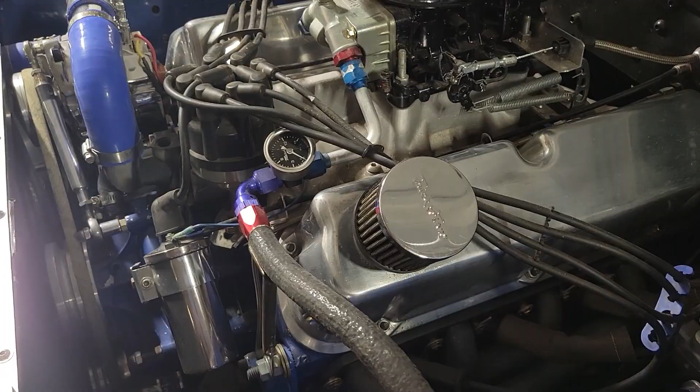We've been climbing around underneath the car and working on some stuff. We also put our little tiny springs in our distributor, got that done. Checked the timing now. We've got all of our timing now in at about 2,700 RPMs. So I think that's going to help us out quite a bit.

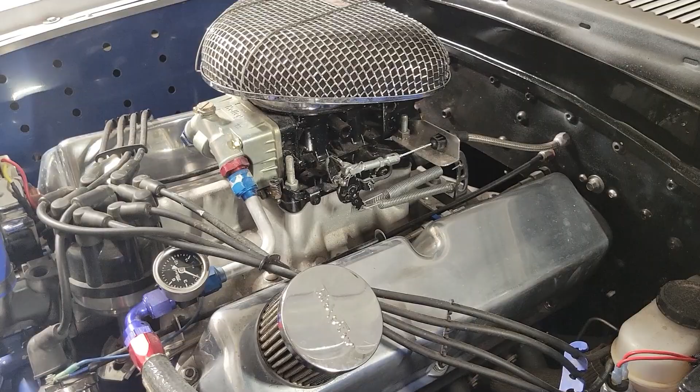The other thing we did is got underneath there and checked our driveline angles. You know, we had a little discrepancy between the front and rear, transmission, the diff, whatever you want to call it. And what we ended up doing was raising the back of the engine up a little bit at the transmount, about 1/4 of an inch, which took some of the downward angle out of the engine to match the pinion angle at the other end.

So hopefully we don't have any more driveline violations. There you go, vibrations. But we'll have to go on a test run to sort that out.

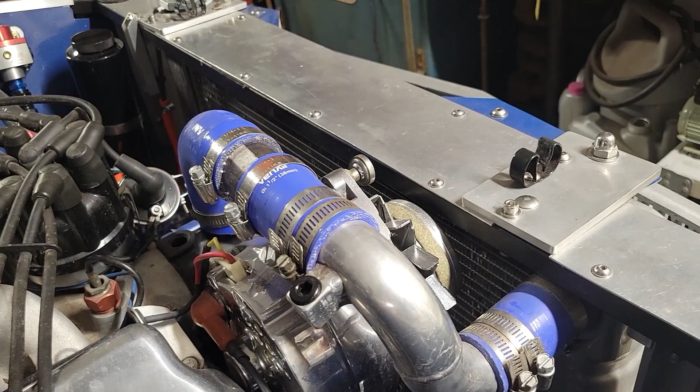We're still trying to cipher this radiator conversion project. And, you know, one of the things we've got to deal with is we've got a piece of box tubing across here, which really makes up what you would call the radiator core support, like a spreader bar between the two fenders. So we really can't come back past that without sort of going underneath it or cutting it out and then putting it on top of whatever we put in there. So we gotta just spend a little time trying to sort this out.

I've had a couple of additional ideas that I've got to look into. One of them would be to see if I can get the dual fan setup first and fit it to this radiator, and see if that solves our problem. And the other thing is, since the super cool rad and the standard cool rad are the same size, once I get the dual fans in there, if I still need additional help, then I can just do a rad swap because everything else is the same. So I'm going to have to look into that.

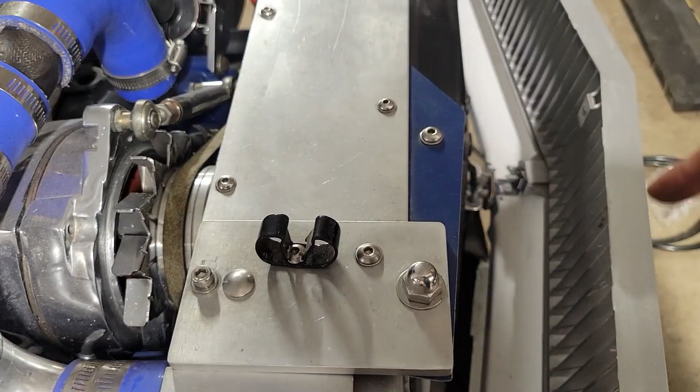I think it'll work. I think we can get the fans on the back side of the radiator, the dual fan shroud, and I think we've got enough room out here to bring the rad out if we have to, however many inches. We may have to trim this lower valance just a little bit because it's kind of V-shaped, so there's plenty of room in the middle, but it tightens up over here, and we may have to notch that a little bit. I think we can make it work.

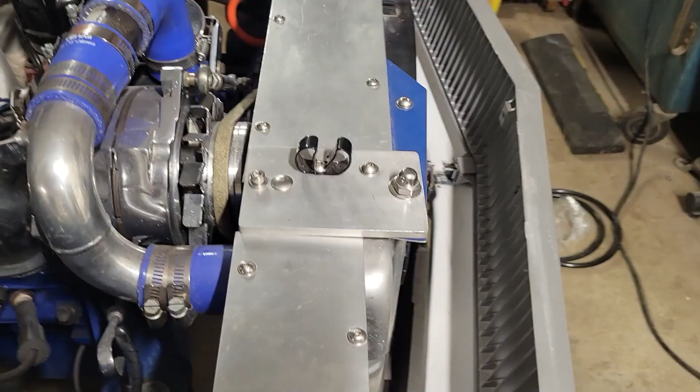I just don't like to experiment. I'd rather be able to have all the dimensions in a template or something and be able to lay the whole thing out and then just put it in there because I know it'll fit. So we'll see what we can come up with. Have to get hold of the radiator people again and see if I can get a little more information from them. I've got some pictures of the product, but it doesn't really answer all my questions. So we'll stay on that.

And we've got the thing up on the lift right now. At some point, we want to put this thing on the ground, and we'll set up our cameras and go for a ride.

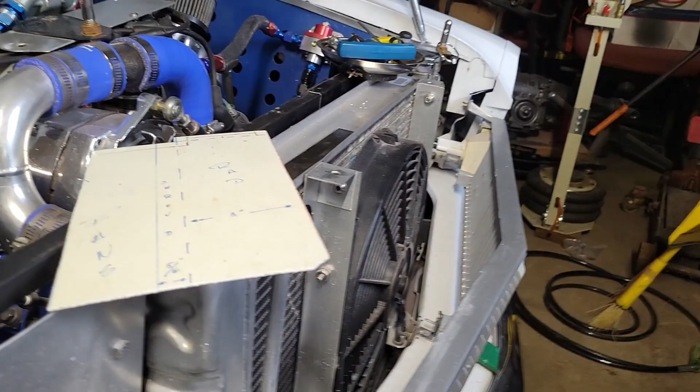All right, we're getting a little deeper into this Pinto radiator project. So we got our template, and we've taken the top off of that. So we can see this is about a 3-inch thick radiator here, at least the tank is. The core here is about 2 1/4, and we have these little lips here.

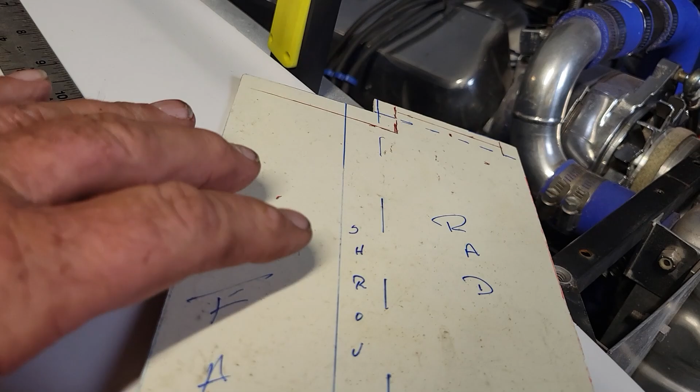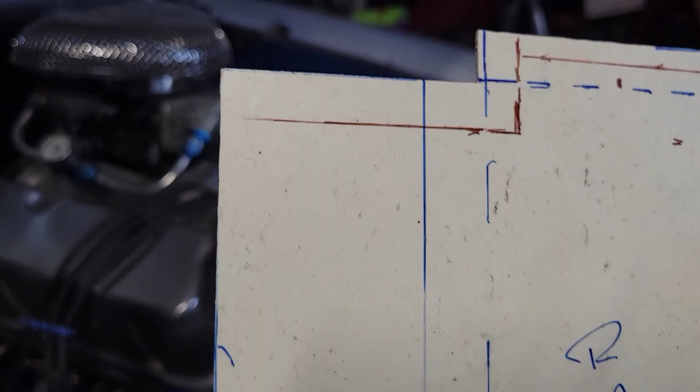Basically, we have our template of what we want to do here to put a shroud and electric fans in. And basically, there we've got our radiator, we've got our shroud, and then this big thick part is the fans. Take up about 2 inches of space.

So I think I'm gonna have to make my own shroud. I was hoping to just buy the package already done and put it in there, but I'm afraid that what's going to happen, I've got this piece of 3-inch tube across here that's acting like a core support, and I'm afraid that's going to be in the way of the shroud the way they make it.

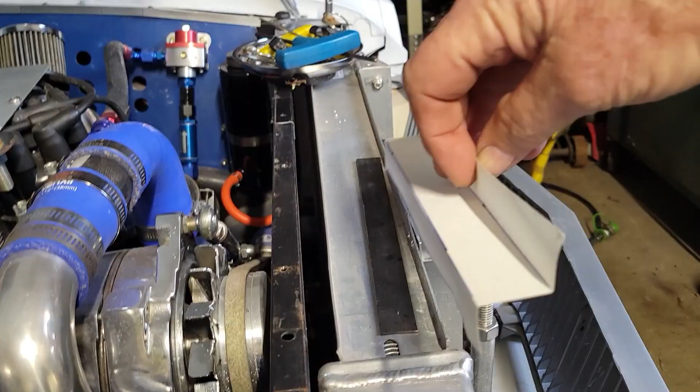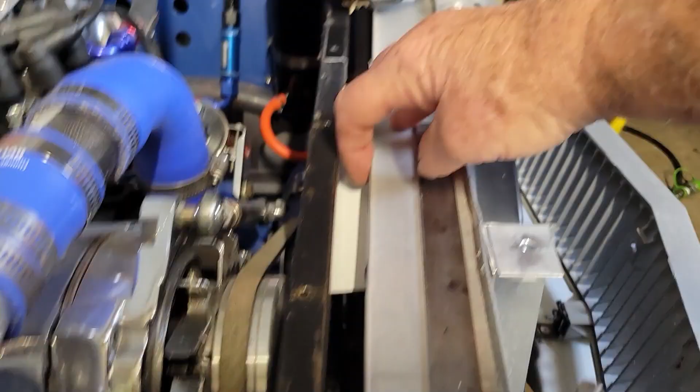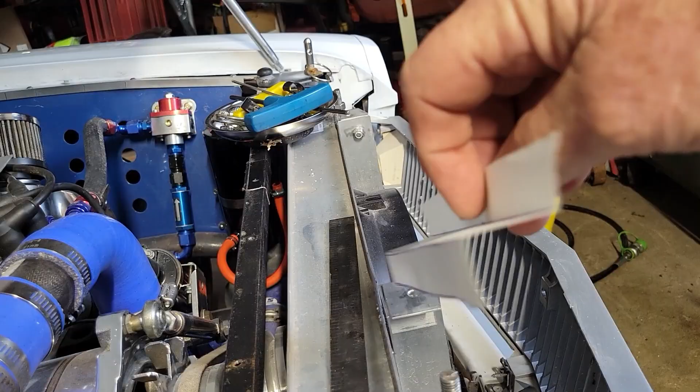So basically what's going to have to happen is I made this little template here, and the shroud will fasten to that lip there above the core, and then go under that piece of tube. And I just don't think the way that their setup is made, it's going to be good enough.

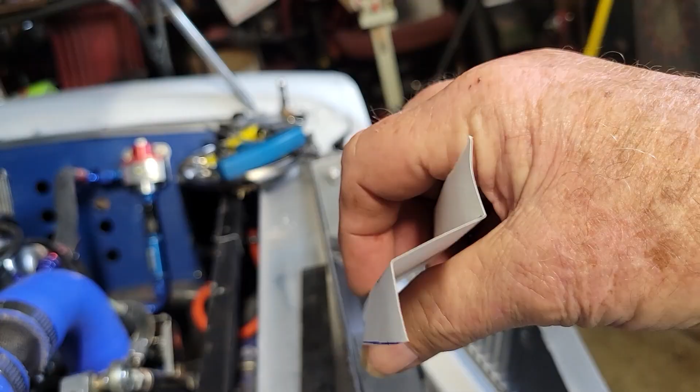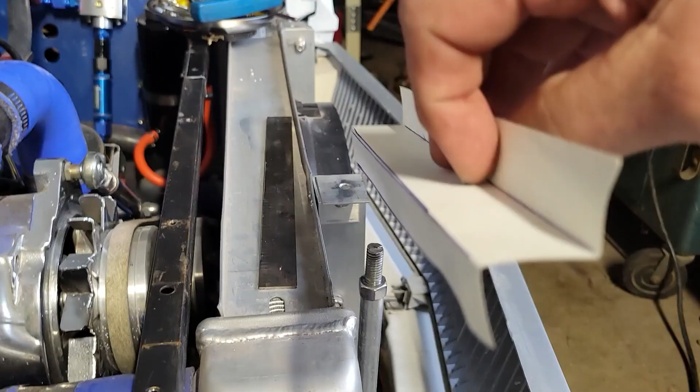This particular piece is 3/4 up and 1 inch wide, and that 1 inch width is going to allow, because this core is set back in here into the tank 3/8 of an inch, so it ends up that the shroud, in order for the fans to be 1 inch away from the rad, that center part's going to be 1 inch. And here in this particular, I made this flange 3/4, but I think what I'm going to do is make it 1 inch, 1 inch, and 1 inch.

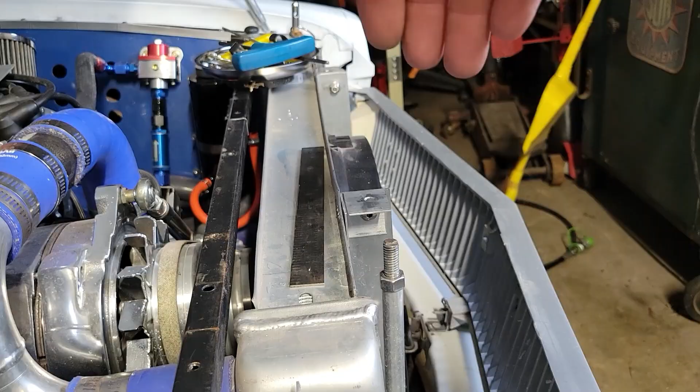And I've got to make this flange the full length, and then I'm going to make the shroud with just a flat panel with a return on each side, and then this will rivet to the top to make the whole shooting match. Rather than try to weld it all together, I'll just rivet this piece to the flat piece, and then that will fasten to this.

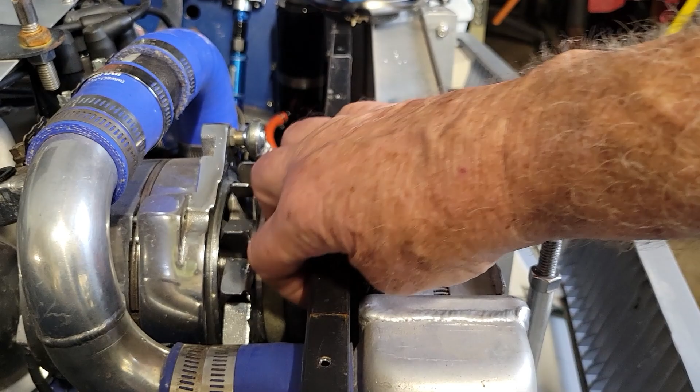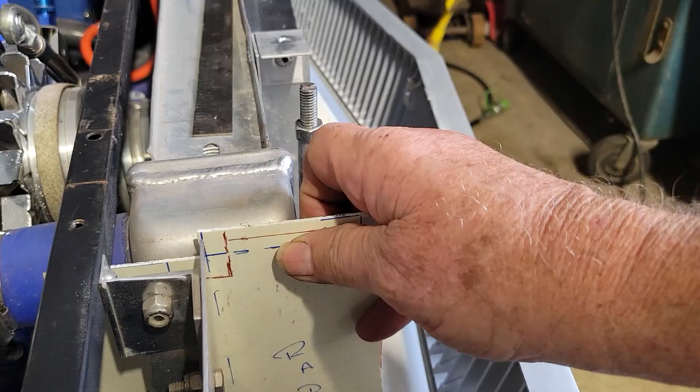And I think by building my own, I'm going to guarantee that I have enough room to be underneath that piece of tubing, because we go back to our template, and what needs to happen is, see if I can fit, that needs to be under there like that, so that really what's going to happen is those fans, the back of the fan is going to be just about flush with the back of that tubing, and that will clear my pulleys.

But that also means that we're going to have to move the whole rad forward about 2 or 2.5 inches. And personally, I don't like that. I like the rad where it is. But, you know, in order to put electric fans on the inside, I don't see really any other choice. And I've already got a fan on the outside. I suppose I could put the shroud on the front and put the dual fans blowing air through, but that's really a waste of a good idea.

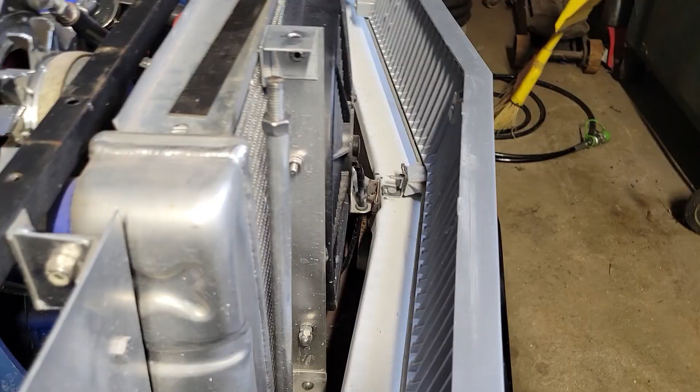So I think what's going to happen is I'm going to have to notch that splash pan there, and probably notch the lower valance, and that rad will come out. It really won't be out any farther than the existing electric fan, but you know, I just don't. I'm not happy. I don't know which one I am, but I am not happy. So, you know, sucks to be me once in a while.

The good news, if there's any good news, is that the replacement bigger, better, faster, stronger, more expensive radiator is exactly the same size as this one externally, just has bigger tubes in it. So I should be able to take this radiator out and build the shroud to fit this radiator, put the whole shooting match back in there, and make sure it fits before I spend the money on the new radiator.

And if I was really bold, I would just take this out, build the shroud, buy the fans, put the fans in, get it all hooked up, put it back in the car, and see if it solved the problem. You know, that's a nice thought, but at the end of the day, I got to take the grill out, I got to take the splash pan off, the front bumper, the lower valance, I got to take half the car apart, so I don't want to do that more than once. But that's the update on cooling the Pinto.

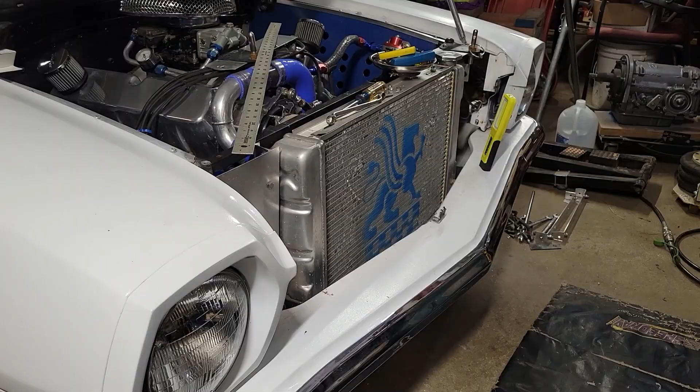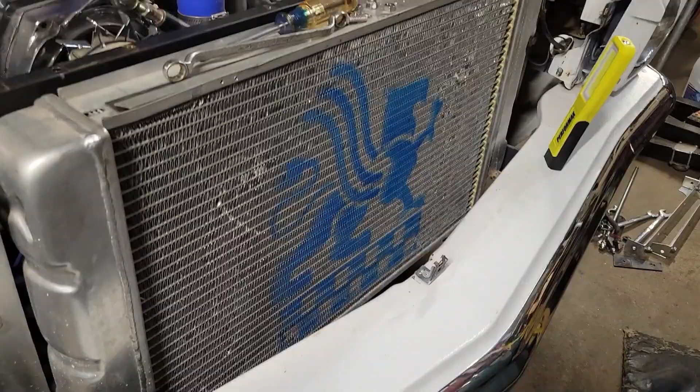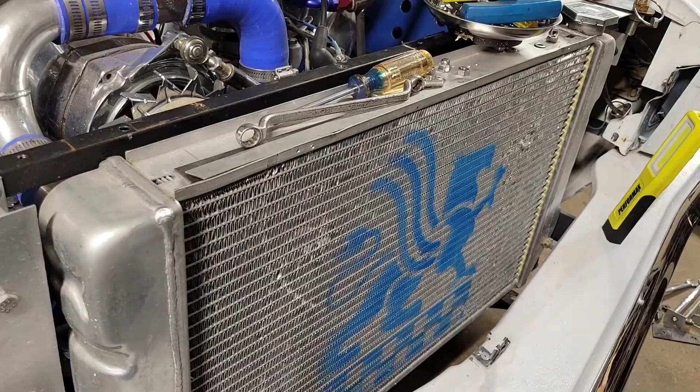Oh man, here we are. Geez, you know, I did a car show thing. I was driving this thing around. Here we are, back in pieces again. Never stops. So we've got the old electric fan out. It was on the front, and all the attaching hardware, so we get a better look at what we've got to do here.

But technically, basically, however you want to address it, we've got to move this radiator out a couple of inches, 2.5, 2 5/8 inches farther forward than it is now, so that the shroud can sit back here.

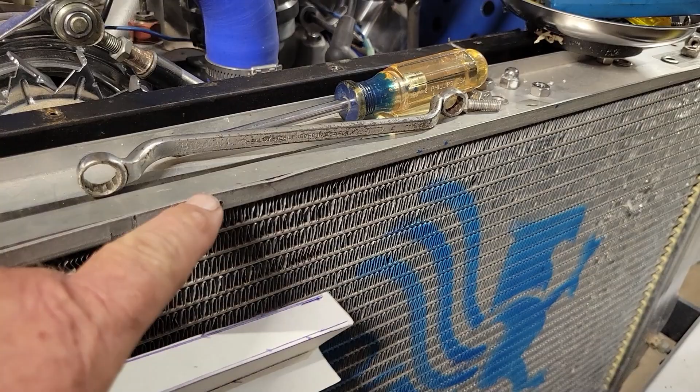And I don't know if I said this yesterday or in the previous clip, but we've got to fit under this bar. So that's the tricky bit. You know I showed this before, but there's little holes right here, and that's where the shroud attaches. So essentially, if you put it on this side, it's going to fasten to that lip and then drop down, probably cover the first row of fins, and then drop down there.

But I don't know, and again, I may be repeating myself, but this company makes a shroud for this radiator that'll bolt right on. What I don't know is if it'll clear this bar. So now I've got to do some ciphering and talk to the company and see exactly what the story is, because I made a template based on my backwards math, and you know how that works.

And I'm also wondering, they probably don't just have these shrouds laying around. They probably make them up as needed. So my question would be, can they make me one that has enough clearance at the top here to clear this bar, if it's a little different than what they normally make? Basically, it's just a little shorter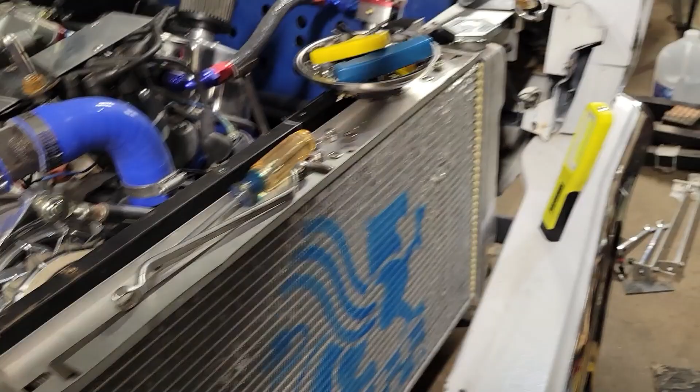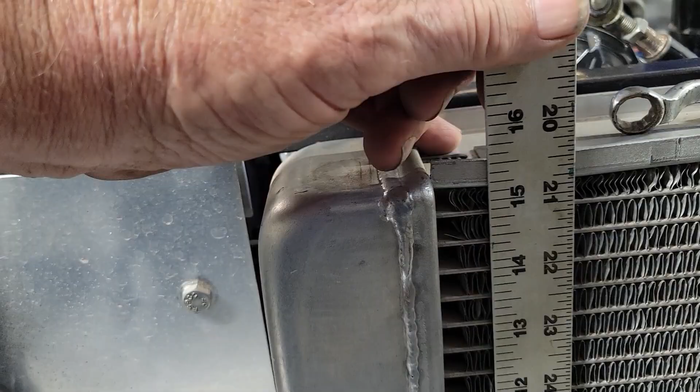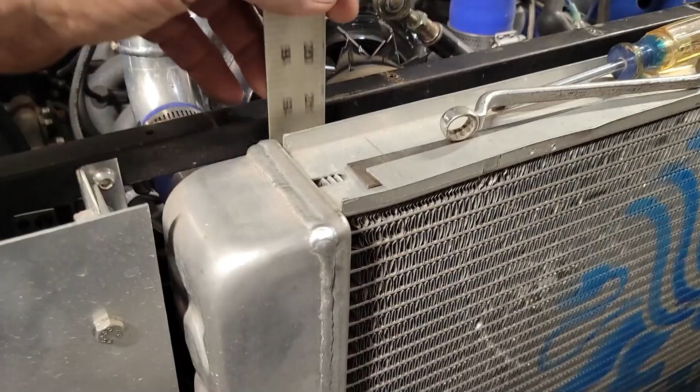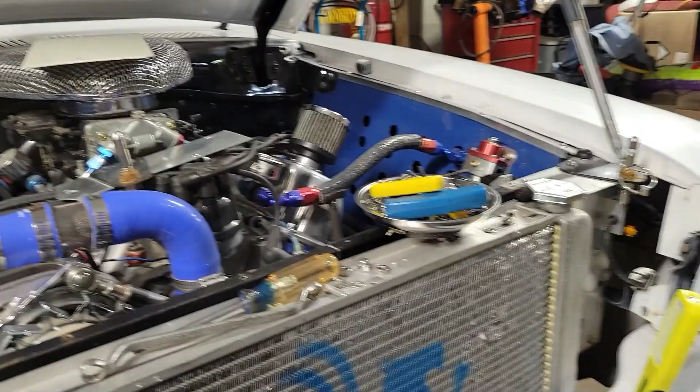unit. I mean, what we've got here now is, if I can get down there, we're 15 and a half from the bottom where the bottom tank sits on some rubber mounts up to the top of that lip. And what I'm going to have to do, let's see if I can look down in there. Yeah. Okay, on the other side of that, looks like 15, and I'm looking at it at an odd angle, 15 3/4, and I know that's some 3/4 tubing, so that means the bottom of that tube is 15 down there.

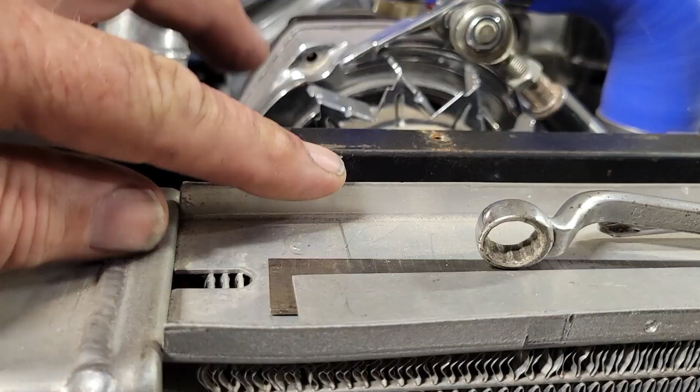I mean, clearly we can see here that we're almost the same height as the top of the tube, and this lip is 3/8 of an inch. I don't know. It's late, and my ciphering ability diminishes by the day, so we'll fold up for today and maybe come back tomorrow with a clearer head and try to figure out what we got here. It's either going to be a case of build our own shroud or get them to build us a custom one, and we're going to have to see which one is the best.

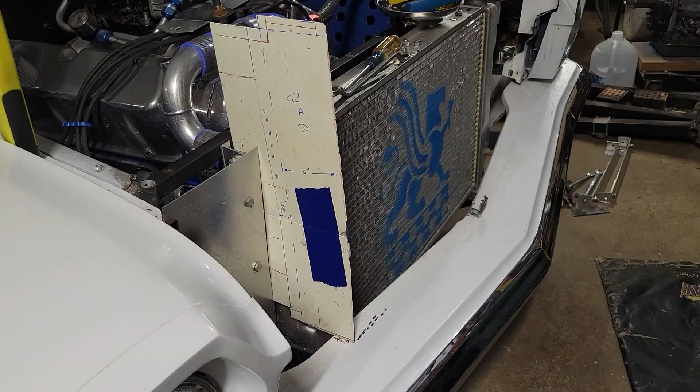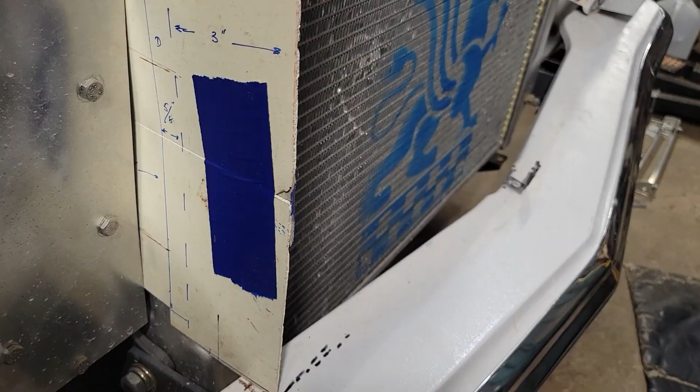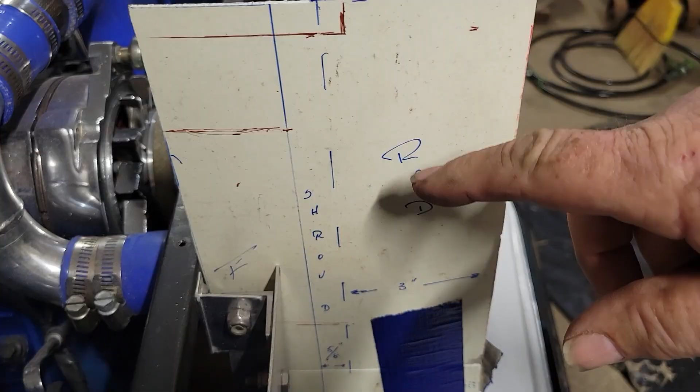Okay, ciphering with a little clearer head now. I had made that pattern and then cut it in half because I couldn't get the whole thing down in there, because I'm going to have to cut the splash apron, but kind of taped it back together, and you can see that's really how much farther forward that rad is going to have to come. One of the things where I was confusing myself: this is my pattern, this is the existing rad, this small section is the shroud, and this bigger section is the fans.

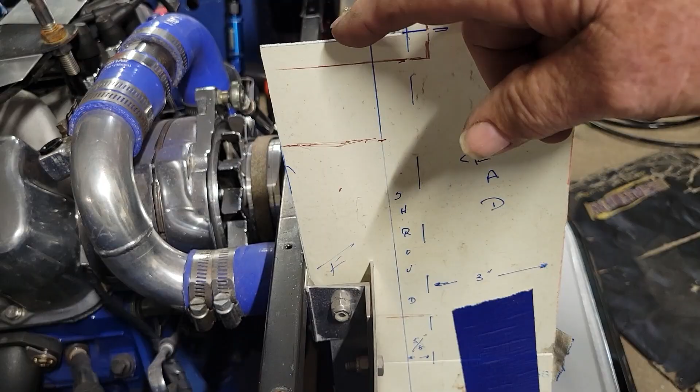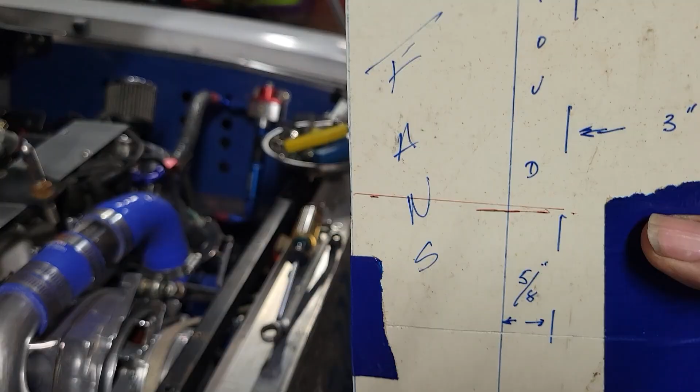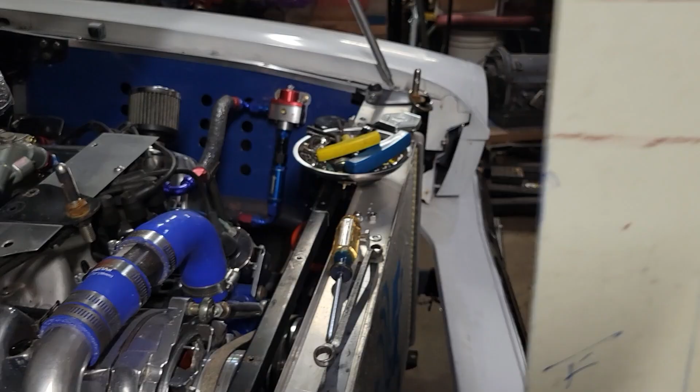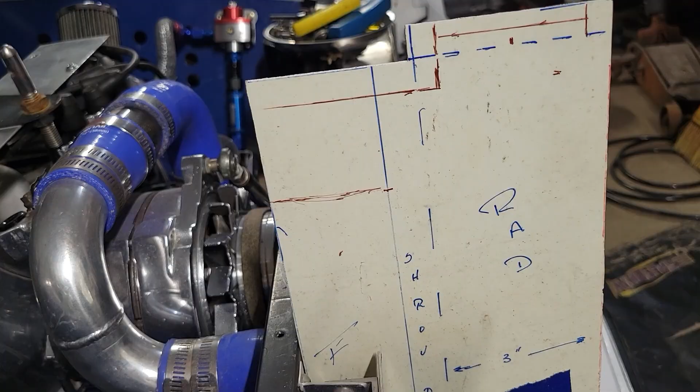Well, I get the DS award for the week because the fans don't come all the way to the top. There are two 10-inch fans in that shroud, so if you go on the center line and go 5 inches either way for a 10-inch fan, you can see that area up there is non-existent because the fans don't come up that high. So my concern was that this whole affair had to fit under that bar, but at the end of the day, it's only the fan part that has to fit under the bar. So if the fans are only 10 inches high and I've got 15 inches between the bottom of the bar and the bottom tray, I should be okay.

Because everything, fans and all, is going to be forward of that bar. Down in there you can peek and see the water pump pulley, and it's got some hex bolts holding it on, and it's just about flush with the forward edge of that bar. Now the good news is that should be more or less in the center of the two fans. So I might pick up a little bit there, and probably I'm going to have to take those hex bolts out and put a button head bolt in there that doesn't take up a lot of space. So, at least based on this, the stock shroud as produced by the radiator people should fit in there. As I say, we'll find out.